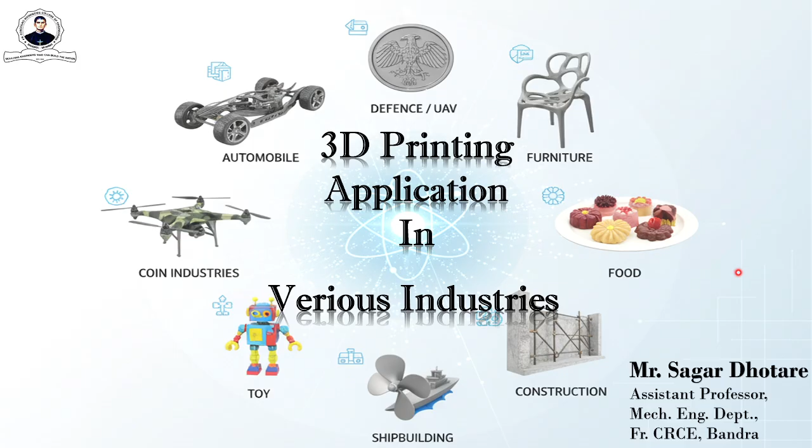So in the previous lecture we have already discussed industries like defense and automotive industries. Today we'll discuss four more industries: the coin industry, household application industry, toy industry, and shipbuilding industry.

So we know the transformative power of 3D printing across industries. Currently it's nothing but a kind of revolution in additive manufacturing, where we can create a complicated product or component in a simple manner, which is very difficult during the normal, or traditional, process. So to avoid this complexity, or the inaccuracy in these complex shapes, the industry has introduced additive manufacturing, or 3D printing technology.

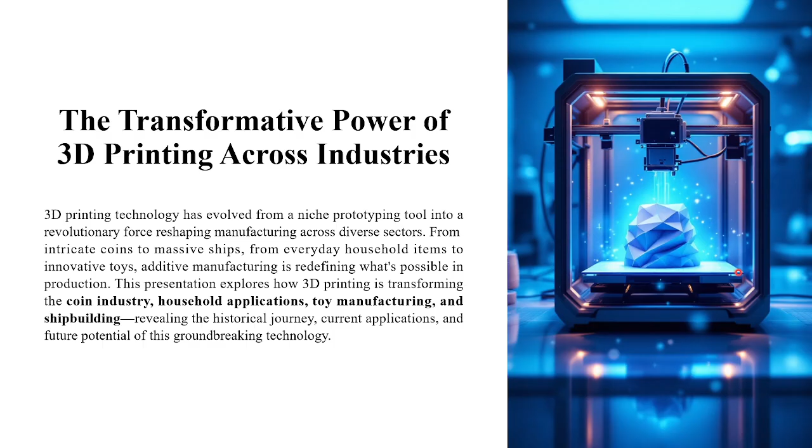So in this lecture series, we will discuss how 3D printing plays an important role in these four industries. Now, historical development industry by industry. First of all, let us consider the coin industry.

After that, in 2014, the US Mint adopted PolyJet and SLA technology to create digital prototypes for coins such as the Baseball Hall of Fame commemorative issues. That is a limited issue published in 2014, which increases the quality of the minted coin as compared to the traditional coin, as the design is more flexible, so the complexity can be enhanced with the help of 3D printing.

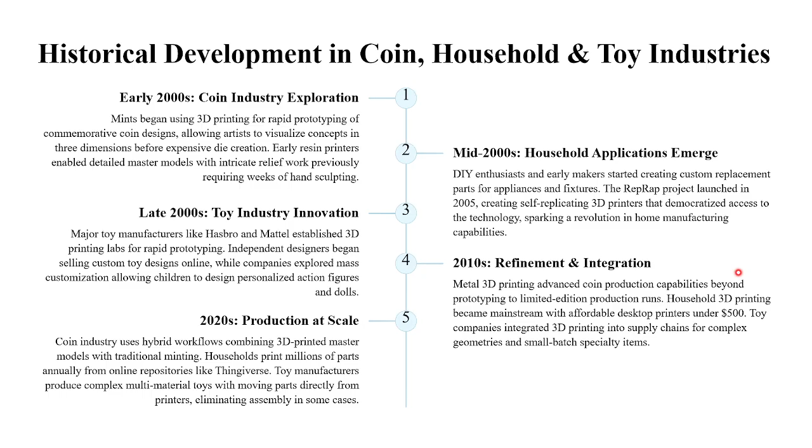Now, the most important thing, what is the role of 3D printing in a coin industry? As we know, the first time a European country minted a private mint coin with the help of SLA method, 3D printing method, and the material used was photopolymer resin. So it is the first use of 3D printing for die manufacturing in a coin industry, by private metal makers in Germany, who used this die for making 3D printed coin dies.

After that, in 2014, the US designed a Baseball Hall of Fame commemorative coin using CAD and 3D printing mockups. They directly manufactured these coins with the help of 3D printing technology.

After that, multiple countries like UK, Canada, Germany, Japan - even in 2021, when Japan organized the Tokyo Olympics, the Olympic medals were manufactured with the help of SLA prototyping technology for steel die engraving.

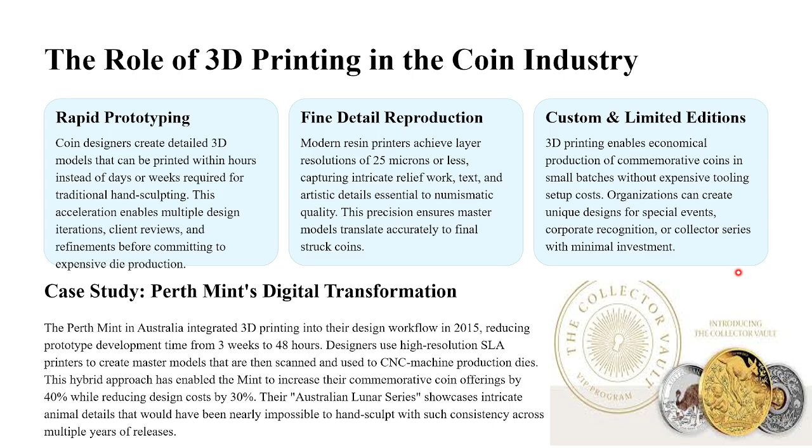Now we need to understand the role of 3D printing in household applications. It revolutionizes how products are designed, tested, manufactured and maintained. It promotes innovation, sustainability, and user-centered design while reducing cost and production time. As materials and printing technology continue to advance, 3D printing will become a central part of smart, sustainable, and personalized home appliance manufacturing, shaping the future of modern living.

They provide some major facilities to the user. The first one is rapid prototyping, which enables quick creation of appliance components such as knobs, handles, casings, and fan blades, helping test design fit, strength, and function before mass production. It reduces development time and cost very significantly.

Customization and personalization: 3D printing allows users to manufacture unique, tailor-made parts as per personal preferences. Modular and user-specific designs can be manufactured with 3D printing, offering more creativity and aesthetic flexibility in home product design. It is generally used in interior design.

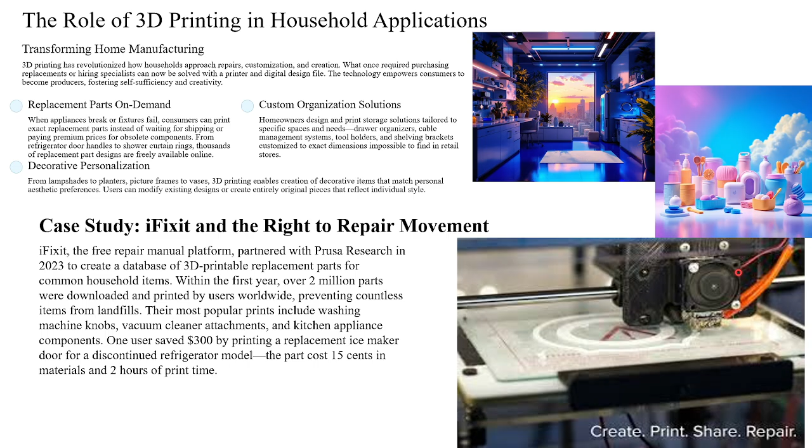So it's a very good example where 3D printing plays a very important role during the fixing or replacement of repair parts.

Next, the important role played by 3D printing in the toy industry. The toy industry has multi-featured toys, and the complexity of these toys is very high compared with other components or other industries. The main purpose is rapid prototyping and concept development, validating shapes, ergonomics, and mechanical functions. In earlier days, each part was developed separately, but nowadays you can directly create the whole part as a single piece, with dozens of variations possible using 3D printing manufacturing.

With 3D printing, you can create complex geometries and movable parts, designing interlocking components, articulated joints, and internal mechanisms that would be impossible or prohibitively expensive using traditional manufacturing. Toys can be printed as a single assembled piece with movable parts, eliminating assembly steps and small parts that could pose a choking hazard for young children. This capability unlocks an entirely new category of educational and mechanical toys.

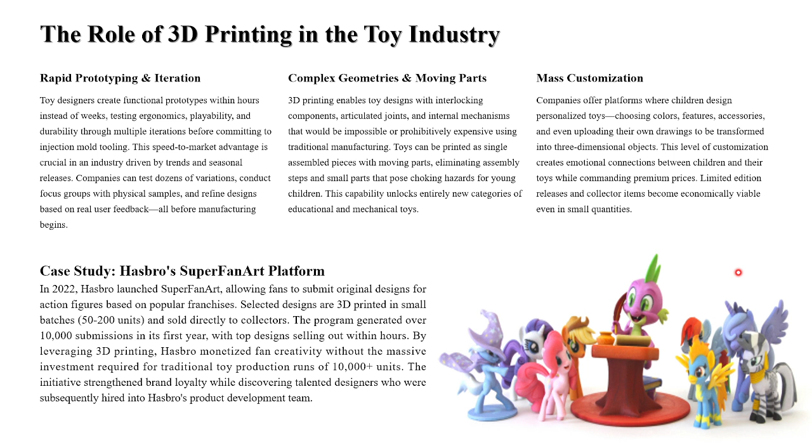By leveraging 3D printing, Hasbro monetized fan creativity without the massive investment required for traditional toy production, which typically runs for 10,000 plus units. The initiative strengthened brand loyalty while discovering talented designers who were subsequently hired into Hasbro's product development team.

Next is the historical development of 3D printing in shipbuilding. In shipbuilding, various parts are in direct contact with sea water, so these parts have a much shorter life compared to other parts. To manufacture parts that can be sustainable against salty material or salty water, 3D printing has been introduced in this segment.

From 2005 to 2010, US naval researchers developed prototypes, prototype tools, and fixtures, exploring the potential application of at-sea manufacturing capabilities on long deployments.

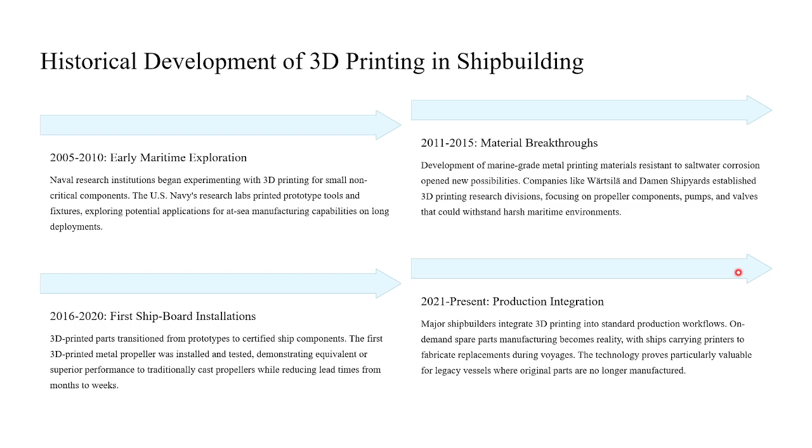Up to the present date, major shipbuilders are now using integrated 3D printing in standard production workflow. On-demand spare parts manufacturing becomes reality with ships carrying printers to fabricate replacement parts. The technology proves particularly valuable for legacy vessels where the original parts are no longer manufactured - they can directly carry their 3D printing machines and manufacture parts whenever required.

Results showed the printed parts exhibit equivalent or superior corrosion resistance and mechanical properties compared with traditionally manufactured equipment. The project demonstrated 60% cost reduction and 75% faster delivery time compared with the conventional supply chain. Most significantly, the tanker crew printed two emergency replacement parts during a Pacific Ocean crossing, avoiding costly port detours and scheduling delays that would have cost hundreds of thousands of dollars.

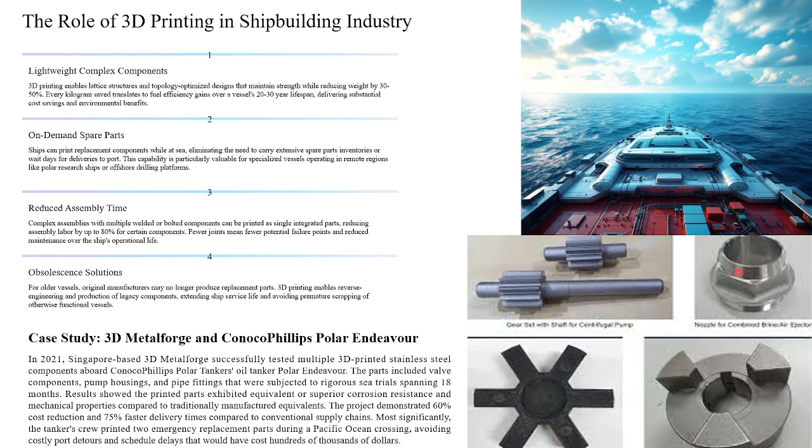Next, we have just seen four industries. Every industry has some advantages and disadvantages of implementing 3D printing in their segment, so let's generalize and see what these advantages and disadvantages are.